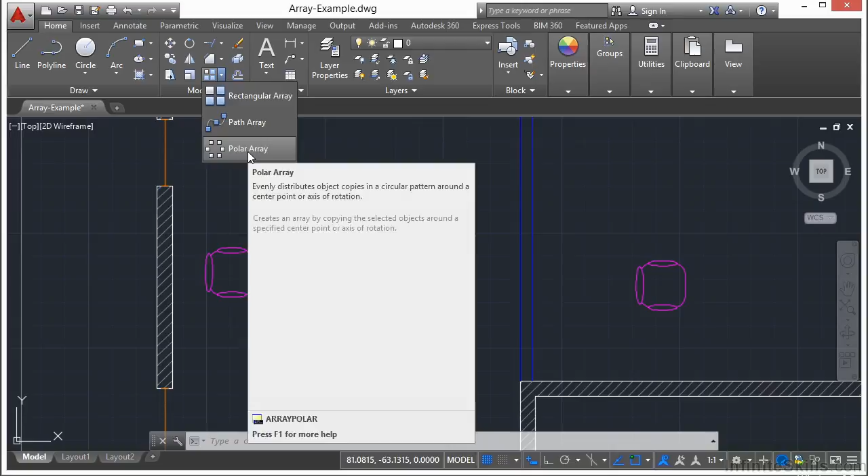So let's pick the chair, press return. And now we have to specify the center point of the array. That's going to be the center of this circle right here. And you can see, boom, it just pops them right in there for us. Now, the polar array works almost identically to the rectangular array. You get a contextual array ribbon called the array creation, and you have all these other options available to you.

You also have grip edits that you can change the angle with. You can also change that length right here. Once you do that, you can change the number of chairs or objects that will be arrayed in that area. So if I pick this here and I stretch it enough, it'll go and keep everything really close, really tight, or 360 degrees. Of course, all of these controls are up here and available to you. So I can control the number of items.

Let's say it's 5. I can control either the angle between them or the fill angle total, whichever one I would like. So if I say this needs to be 180 degrees, and there are 5 of them, they're going to be 45 degrees apart. Or I can go to 360 degrees, back the way I had it. And I can change this number here. Say I just pick randomly 56. It'll change the fill number for you automatically. So it just depends on what you want to do.

Now you can change the number of rows. So let's say I need 2 sets of chairs. If I type in 2, it will give me 2 chairs. And all of the items are going to come out radially. Now levels is for a 3-dimensional polar array. So this will stack chairs on top of chairs. In this case, I only want the 1 row though.

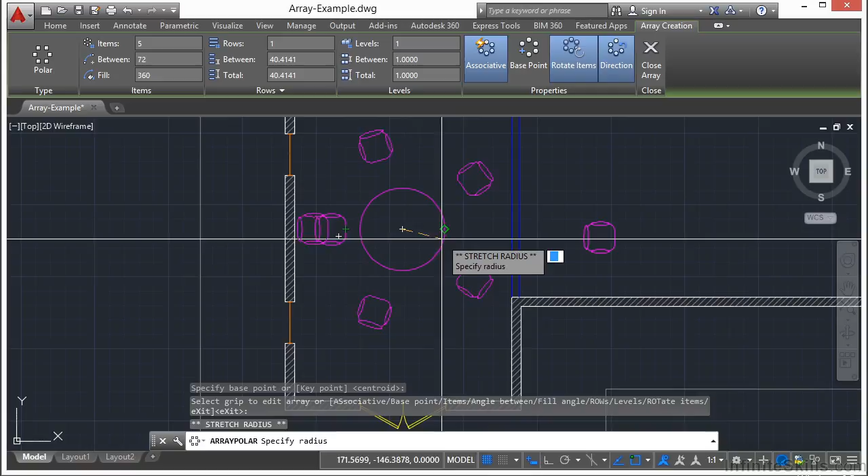Now I do have a few options here. I can change the direction. I can rotate the items or not. This way the chairs, as you can see, are all facing the exact same direction. Well, I want them to all face the table, so I'm going to leave that on. I can change my base point this way if I'd like, and this makes it associative. If I turn that off, then I won't be able to edit the chairs as a group later on. Once I change this, it shows how far away my chairs are from the center of my base point option. I'm going to undo all that and start all over.

If I go to my polar array again, select my chair, press enter, select the center of my table, and I get this all right here. So it's actually very simple to do and very quick, as you can see. Now, if you change your base point, that's going to redefine where the location of the grips are going to go.

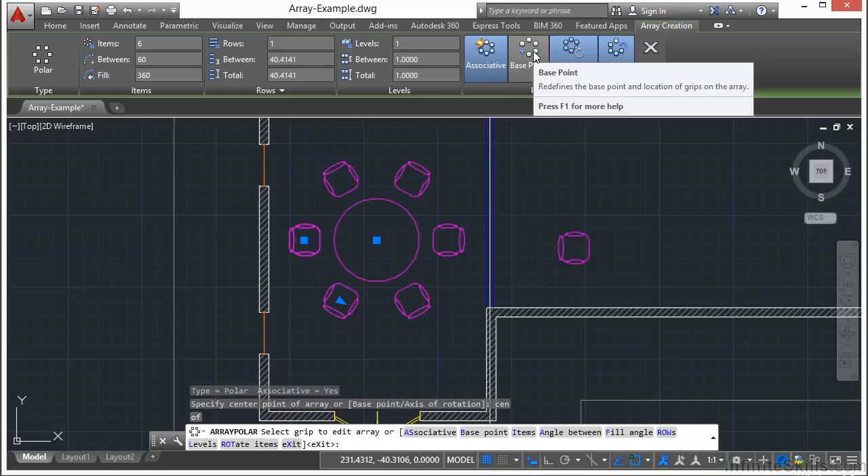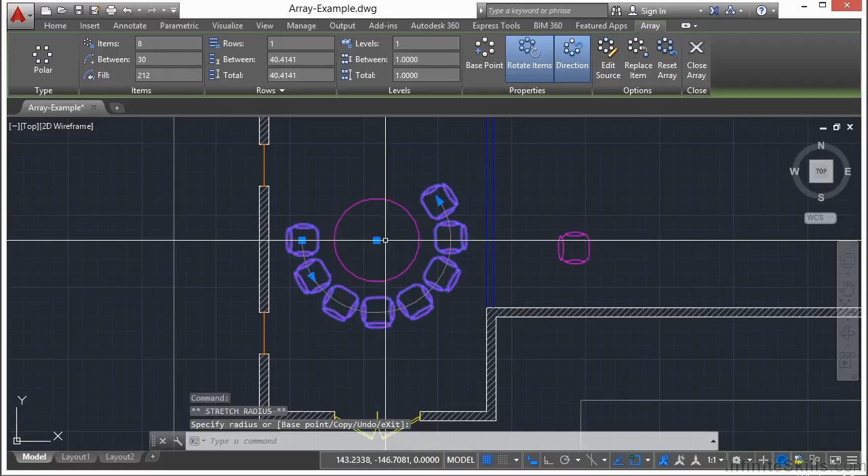Now, when I'm done, I click close or press the enter key, and I have an associative array again. Once I select it, I get my contextual ribbon back, and I can make all the changes that I want to here as I'd like. I can also change some of these options here with my grip edit, just as I did before. I can stretch these out, make them a little closer, a little farther away, and here, this grip will let me move them as a group.

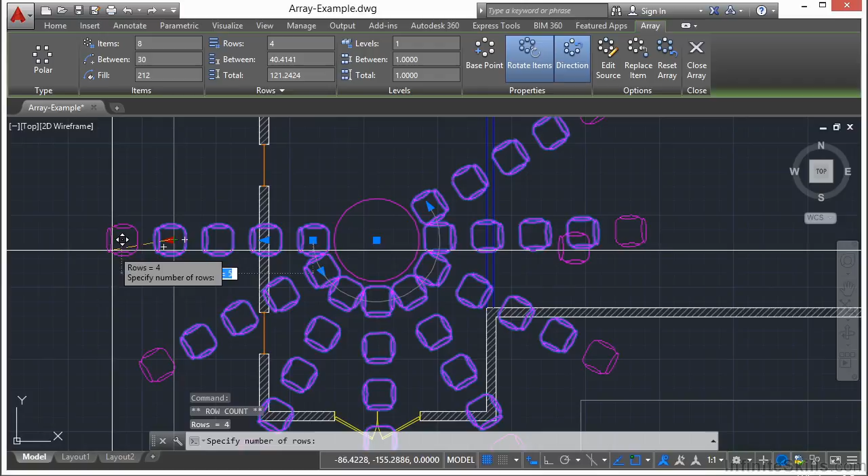If I hold my mouse over my grip edit, I have a couple of different options. I can change my row count and get a lot more chairs. I can change that radius. And then once I have multiple rows, of course, I can change those grips this way as well. So that's the polar array. It allows you to make polar radial objects very quickly.